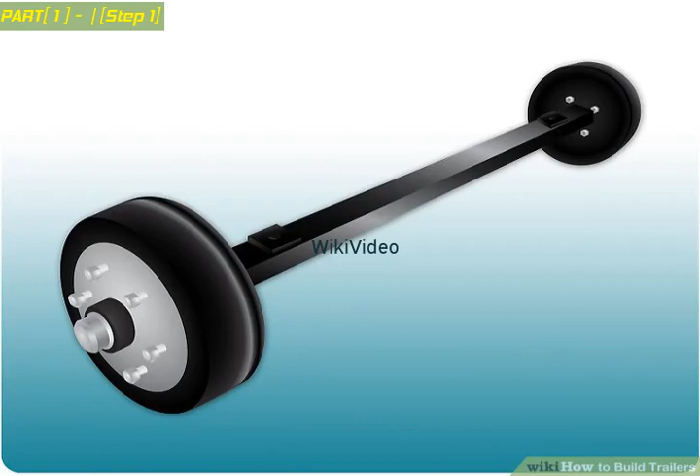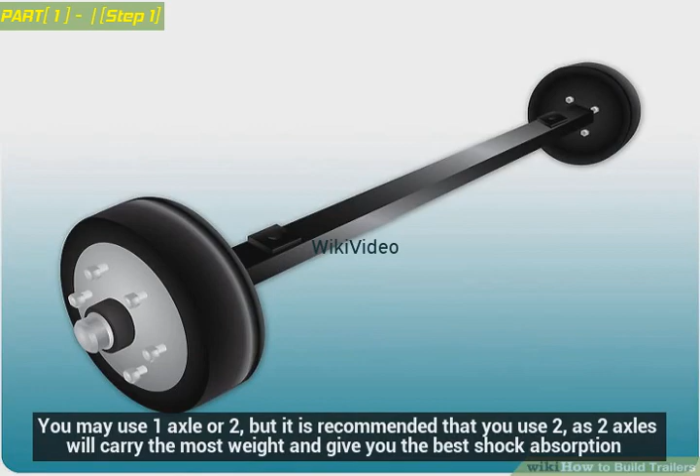Find axles. You may use one axle or two, but it is recommended that you use two, as two axles will carry the most weight and give you the best shock absorption. You have some choices when it comes to searching for axles for custom trailers, so keep the following things in mind.

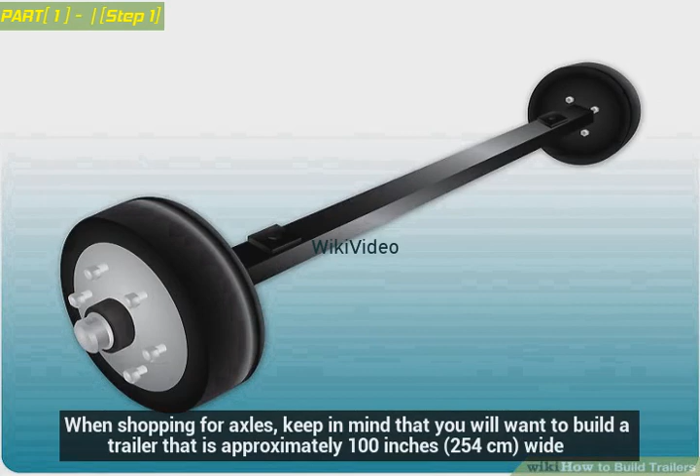A junkyard is a great place to find inexpensive axles. You can make a trailer out of old truck axles or mobile home axles. The axles you choose should have springs and brakes. When shopping for axles, keep in mind that you will want to build a trailer that is approximately 100 inches (254 centimeters) wide.

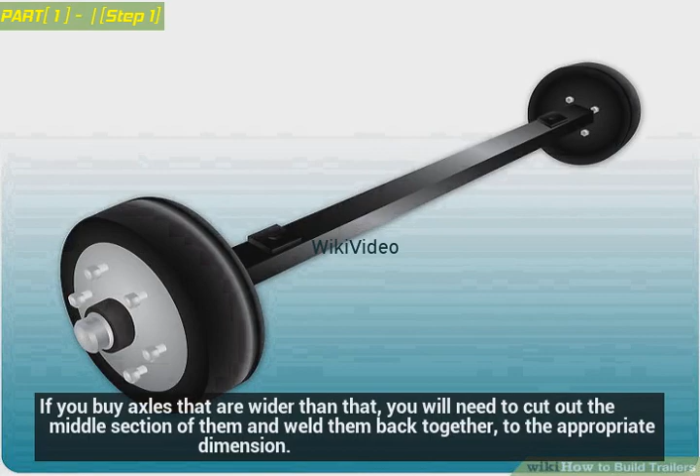If you buy axles that are wider than that, you will need to cut out the middle section of them and weld them back together, to the appropriate dimension. Buy wheels, if your axles did not come with them. Use only tires specifically made for trailers. They should be 15 inches (38 centimeters) wide and made of bias ply nylon.

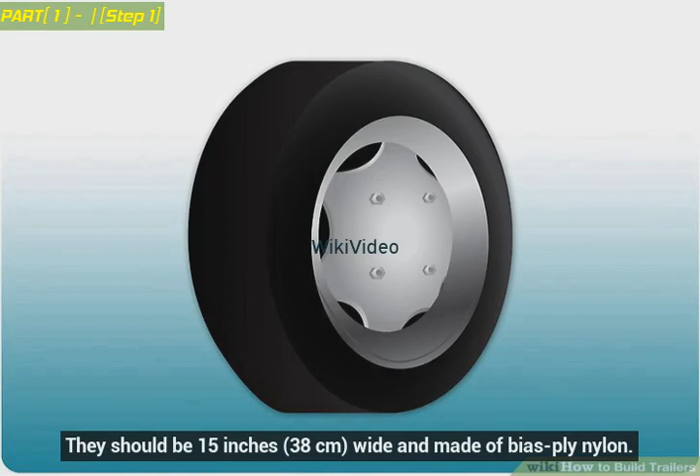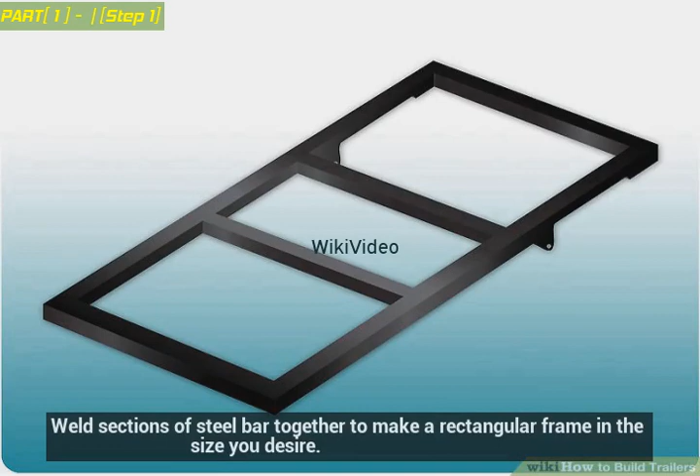Build a trailer frame. Use 4-inch (10.16 centimeters) by 4-inch (10.16 centimeters) steel bars. Weld sections of steel bar together to make a rectangular frame in the size you desire. Verify that the frame is a perfect rectangle by checking the corner angles and the cross measurements from one end to the other.

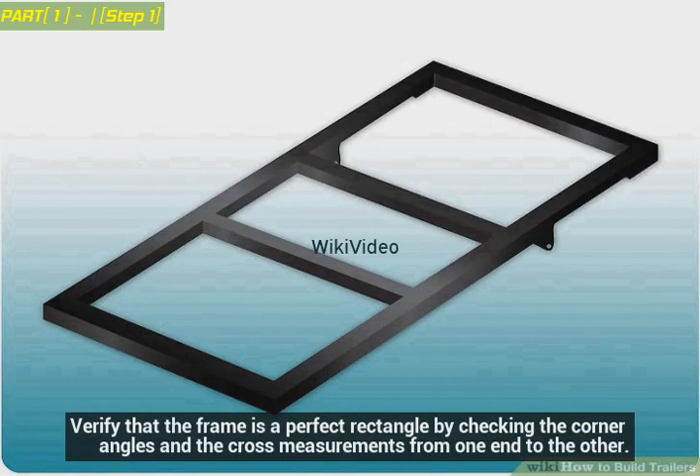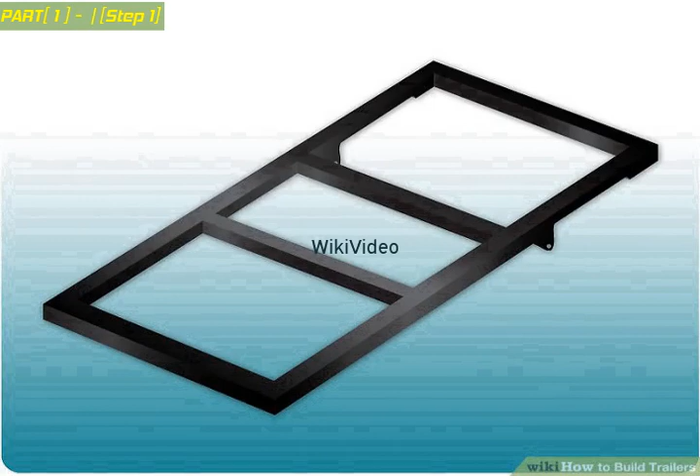Cut 5 steel bars to the width of the frame using a chop saw with a blade specifically made for cutting metal. Lay the axles underneath the frame for reference. They should be 16 inches (40.6 centimeters) past the center mark, toward the end of the trailer.

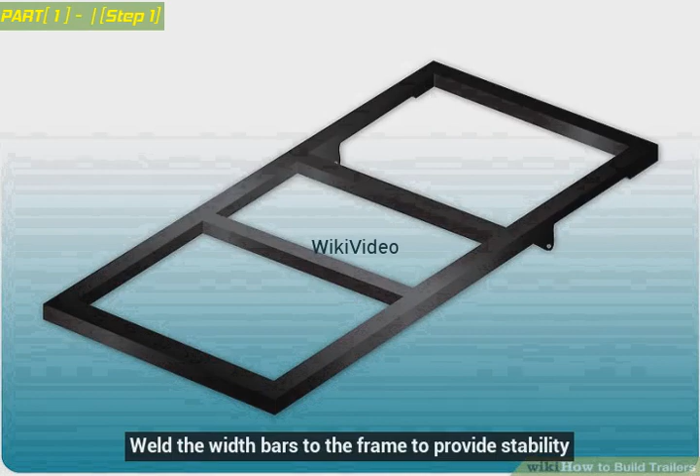Weld the width bars to the frame to provide stability. Start with the center bar, which should be placed in the middle of the two axles. Weld the next 2 bars at either end. The remaining 2 should be welded at the spring hanger mounting points.

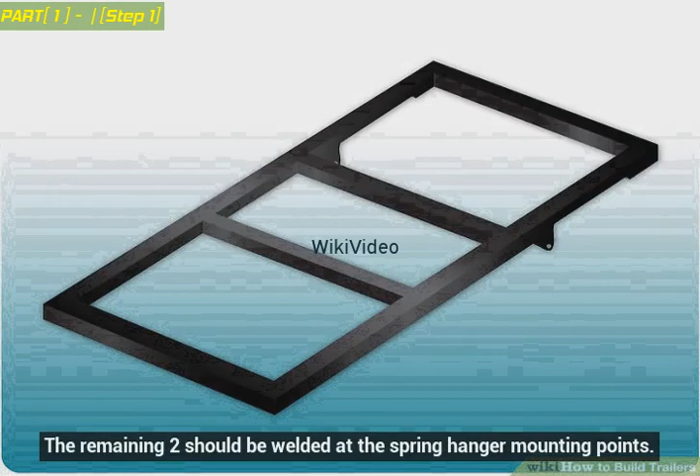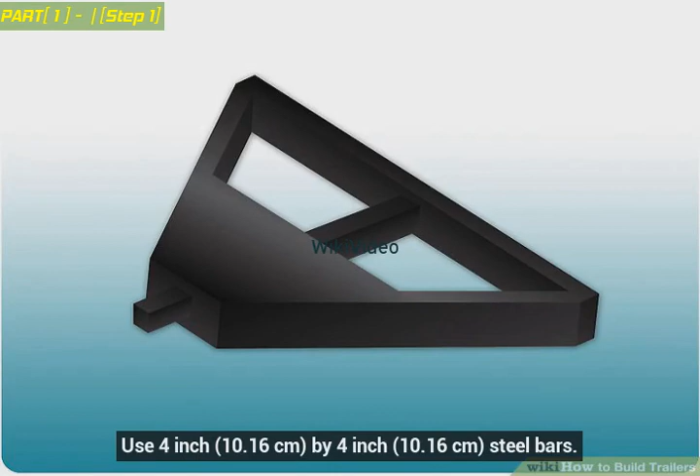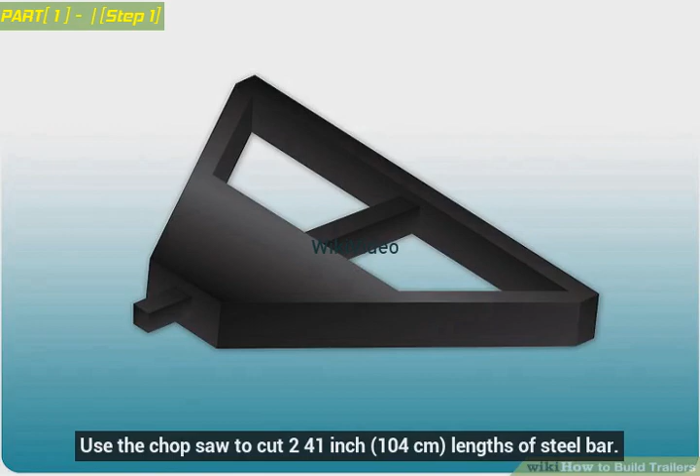Make a trailer tongue. Use 4-inch (10.16 centimeters) by 4-inch (10.16 centimeters) steel bars. Use the chop saw to cut 2 41-inch (104 centimeters) lengths of steel bar. Position the steel bars so that half of them lie underneath the frame and the other half extends out the front of the frame.

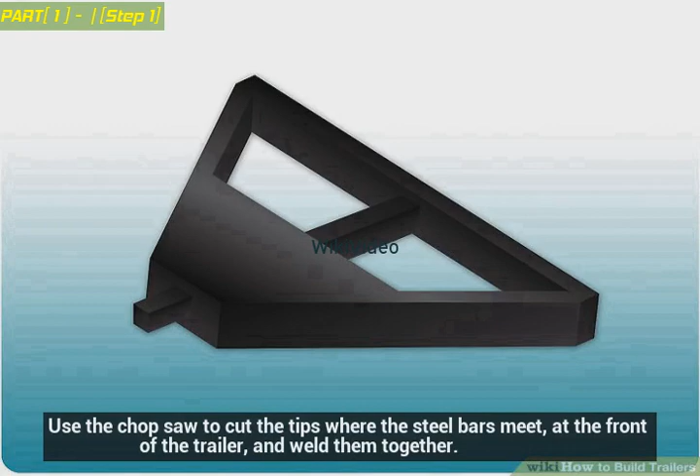Weld them to the front of the trailer frame, one on each side, angling them so that their ends meet, forming a triangle. Use the chop saw to cut the tips where the steel bars meet, at the front of the trailer, and weld them together. Weld a hitch that is compatible with the vehicle you will use for towing to the tongue of your trailer, where the 2 tips meet.

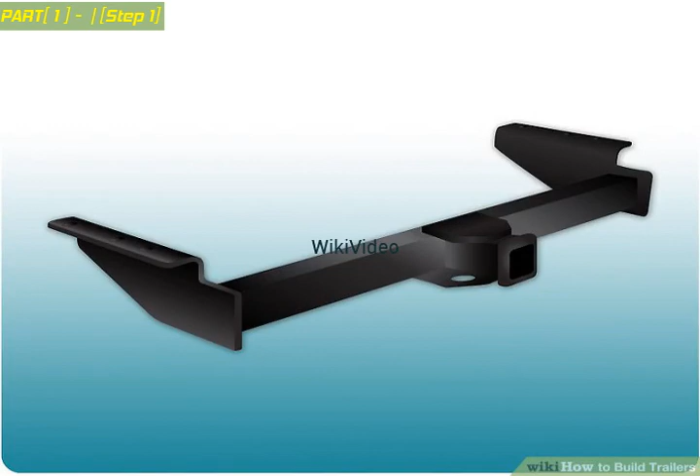Attach the axles. Flip the trailer frame over so that its underside is facing up. Lay the 2 axles on the underside of the frame, lining them up so that they are on either side of the center crossbar of the trailer frame.

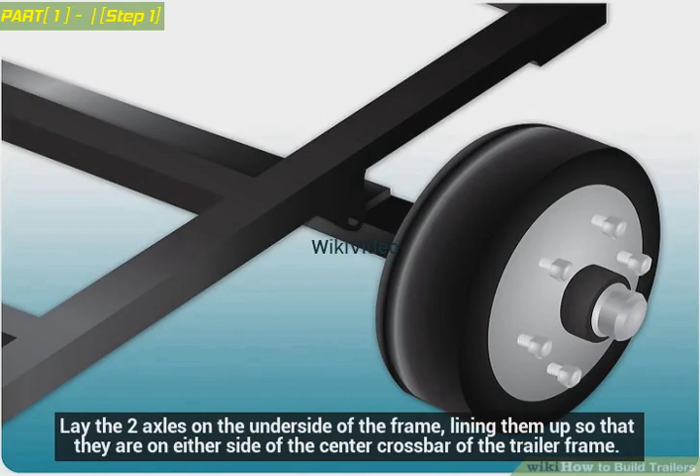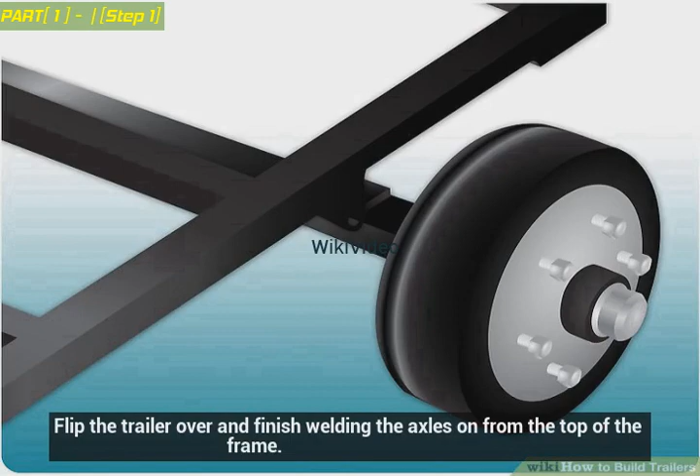Weld the spring hangers of the axles to the frame. Flip the trailer over and finish welding the axles on from the top of the frame. Cover the frame with heavy gauge metal plates cut to size and weld them in place.